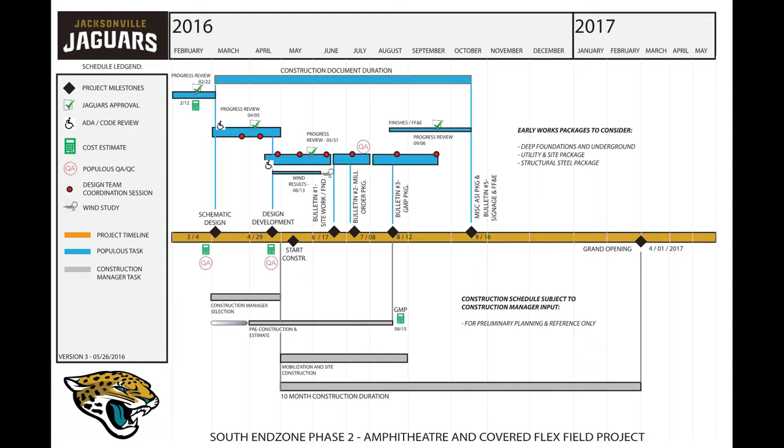Knowing we had this constricted period of time, this highly complex project, we needed to find a way to define our process, define the people doing it, and define the programs we'd use to execute on this. Now, we all talk about collaboration—everyone collaborates, we get it, right? But how do you take a project and a distributed workplace and make it work?

Walter P. Moore used offices in Los Angeles, Kansas City, and Tampa. Populous had people in New York City and Kansas City. We had engineers all over the place.

We had our construction manager in Indianapolis and Jacksonville, and ARUP, which is out of New York. So we had to figure out how we could define a workflow and a work plan and create it in a more integrated way.

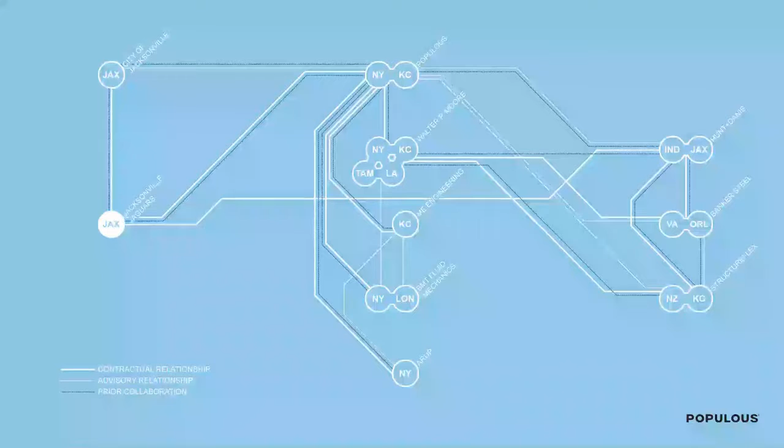Steve likes to refer to this as the London Underground map because it's all over the place, but this is a cool diagram because it shows the 18 different entities with the 3 different relationships. This project was a design, bid, build project, but the minute we signed a contract, all that went out the window.

It was definitely design assist, it was IPD, it was all those things. So what this shows is Populous is at the top of the page in New York and Kansas City, and then under that we had Walter P. Moore, and again we mentioned all of their offices, Los Angeles, New York, Kansas City, and Tampa. And then the map just kind of shows how much of these collaborations and communication strands are advisory versus contractual versus prior collaboration.

In other words, when we were asked to take over ownership of the materials model, the fabrication model, obviously the first thing we had to do is change everything, open up a dialogue with Banker Steel, who was the fabricator, and Walter P. Moore and Populous had to have that conversation. We weren't obligated to do it, but we knew we had to do it. So this essentially blurs the line.

The other thing, as Steve and I were having drinks last night, we were talking about -- we don't endorse this process. We were put in a position where we had this fun, very unique project that was important to us, and we had a period of time to develop it and execute it. If it ever happens again, I think all our bosses will be like, don't agree to that, because it was just so intense.

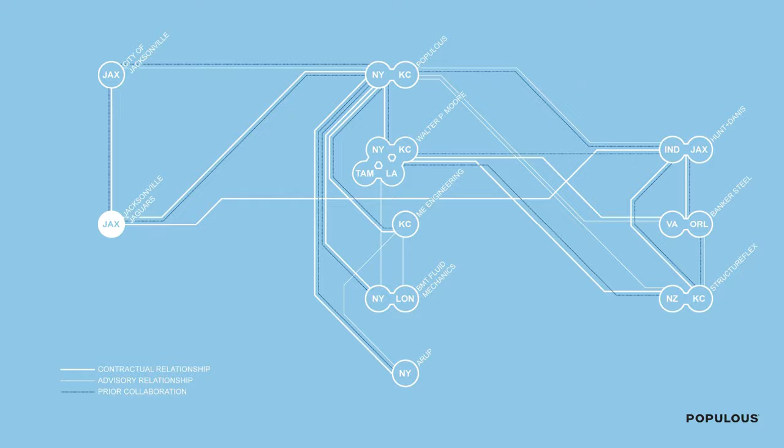So once we defined the period of time, we had our schedule. We know when our drawings were going, what bid packages we were going to target. But what we did was, Walter P. Moore actually authored this schedule on the left.

You don't need to read all the red and blue stuff up top, it's very linear in nature. We were doing things before other things were done, taking tremendous risks, just making sure we're talking to people and saying, if we do that, this has to happen next, and making sure people knew they were accountable. We really kind of set a table and said, look, these 6 things have to happen, and if one of your things isn't happening, you need to let everyone know as fast as you can.

What this defines is it took our schedule and our design time -- and I'm not talking just schematic design development, I'm talking fabrication. I'm talking Walter P. Moore developing the Tekla model within 11 weeks.

Halfway through that 19 weeks, these guys are building a steel model, taking the Rhino model, putting it in Tekla, doing the Tekla model, providing shops, having dialogue, flying out to Lynchburg, Virginia, meeting with Banker Steel, and really trying to figure out the best way for us to take our models and convert them to Banker Steel for fabrication.

Fabrication took 19 weeks, and then erection took 18 weeks. I'm talking erection of 160,000 square feet of area, which encompasses a 94,000 square foot covered indoor football field and a 6,000 seat amphitheater connected to the stadium.

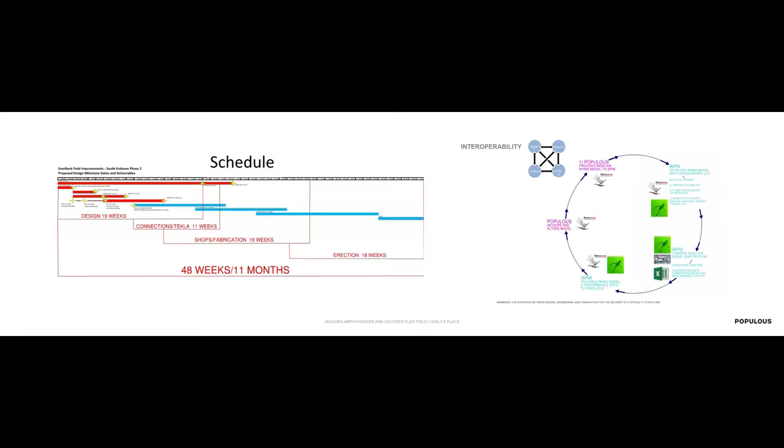So the workflow -- I didn't say everyone's done all this stuff, but we did it, and we did it all in a condensed period of time, and we reinvented the way that we were working.

So this diagram shows the different parts of the 5 little wheels of action. Populous and the design team, including Walter P. Moore, because that was part of the prior collaboration at the onset. We came in, started designing, and defined what was a priority.

We knew it wasn't about the floor plan right away. We knew what the floor plan basically was going to be, we knew what the program was going to be. But we had to start down from the top -- we had to start with the iconic nature of the roof and how the roof was going to be, well, iconic.

I know it's totally subjective, but in this term, Shad Khan had his version of iconic, and we knew we had to do something different than he's ever seen before. So we took 3,000 tons of steel, hung the roof from it, and then built a fabric box around it.

Then we encased all that with concrete. So now we knew we're hanging a roof from the structure, so from inside the space you're looking at the waterproof environment with all of the steel penetrating. Obviously that's a task in itself.

So we started the model out in Rhino and Grasshopper to define the process and what the shape and form was. That Grasshopper model was currently shared with Walter P. Moore on a regular basis. That process went through optimization, and Walter P. Moore could help us rationalize cost. Obviously, I mentioned cost was a big deal.

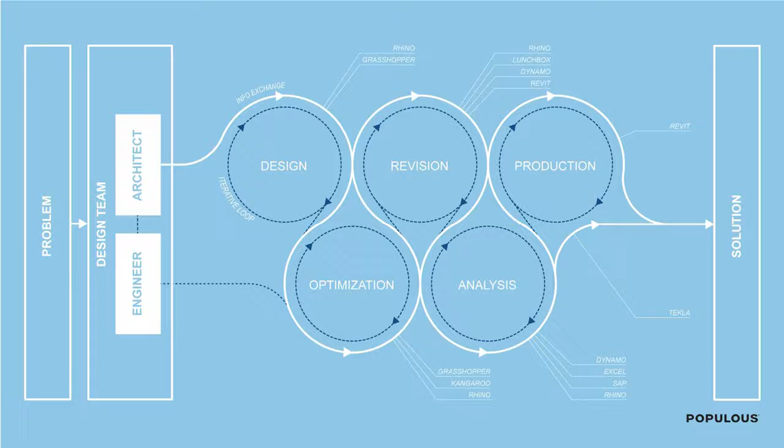This is just a good diagram, very illustrative of the parts and pieces. Starting here from the left, I mentioned we had the roof hung, a PTFE roof, a Sheerfill product if you're familiar. We used Grasshopper to really organize the process, and to me it was important that it was organized so that we had multiple people in multiple different places using the same Grasshopper script and platform. We always talk about BIM plans, right? This should also be a part of that.

So the design, let me spend real quick and tell you about this design. The iconic design is performance-driven aesthetics. This thing is for the Jacksonville Jaguars and the city of Jacksonville, a 50-50 venture. Obviously Jacksonville is a coastal town of northern Florida.

It's bordering St. John's River, with a lot of estuaries. It was an old shipyards town, so it's very industrial. It's got three really beautiful bridges, all different colors, all illuminated. It's part of their vernacular.

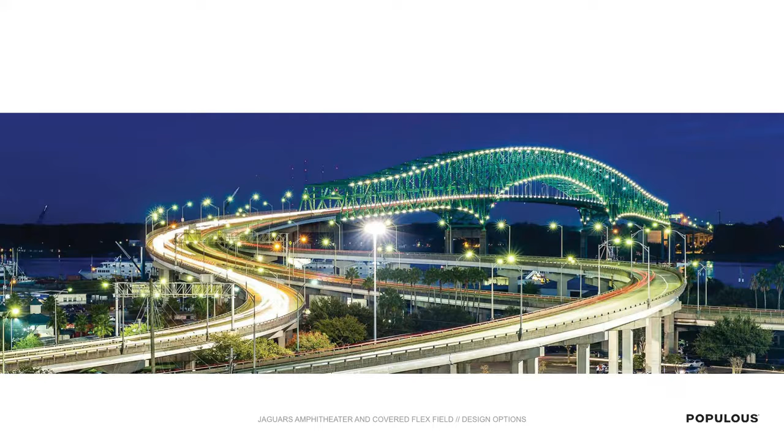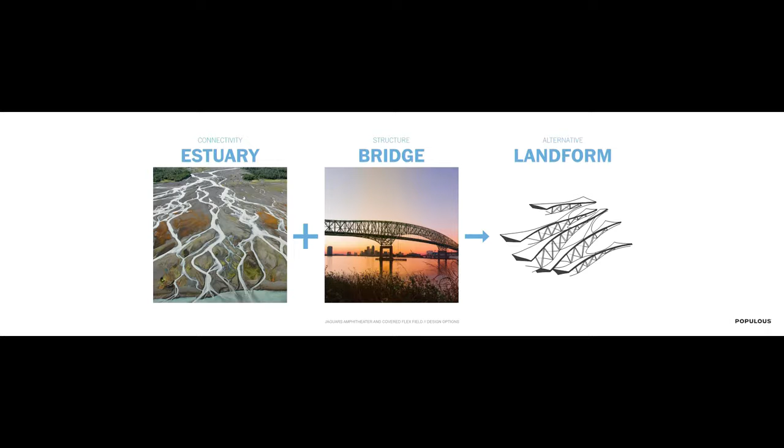So you have this culmination of estuaries, these bridges, and the landforms because of the sea dunes, and it's a beautiful place. So Shad likes that, right? So we use that as our driver. And then we also knew from a programmatic standpoint, it had to influence sport. It had to invoke their brand. It had to be a part of who they were as a growing team. Finally, they're good, so that helps. We like to blame it on the covered flex field too. And it had to entertain.

So now Shad Khan's trying to blend two programs. Nowhere in the National Football League is there an amphitheater and an indoor training center that systematically unite, which is one of a kind. Therefore, there wasn't much precedent we could take from it. We did tours of amphitheaters, went all over this country looking at the eastern side of the country, and really tried to find a way to bring in entertainment.

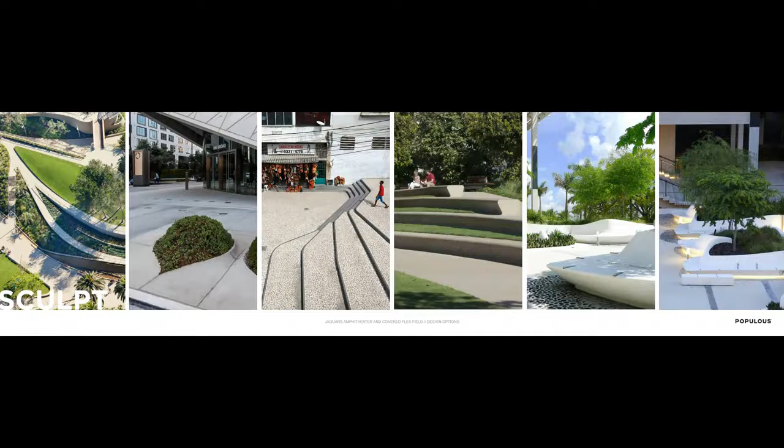It obviously had to interact. He wanted people to move through the building. He wanted it to be iconic. He wanted it to be a place, even if there's no show, he wanted people to come and hang out. Again, we talked about sculpture. So these are all the drivers that we showed to kind of get them going.

We talked about performance from a building, how it was supposed to operate, but how does the building, all these parts and pieces we just talked about, we had to figure out. So the existing football stadium is connected by the amphitheater. The amphitheater is a 3-level amphitheater.

This section, when we did a sightline study and we were trying to define how close everything goes, we studied a lot of different little boutique theaters, right? Because 6,000 seats is not that big. We're not talking a big - we're talking Broadway, Radio City Music Hall type of facility. So what we did is we took the Radio City Music Hall section, kind of parti if you will, and we really kind of organized around that. So the sightlines in this place are incredible.

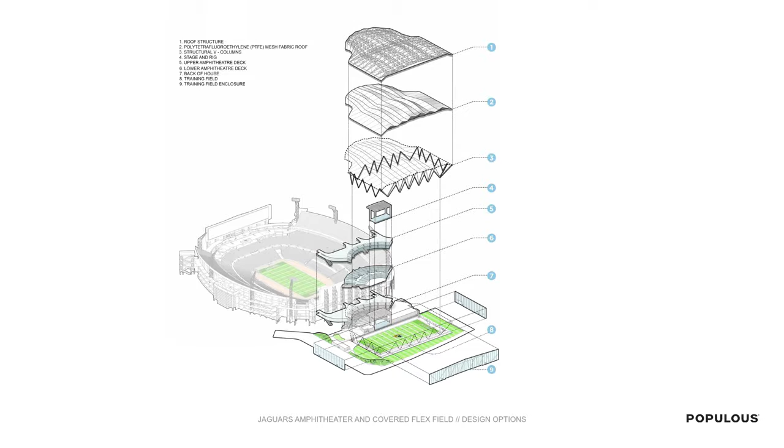And then that had to abut up to an indoor practice facility. And then of course there's public and private security reasons that we'll get into. So that shows the kind of section. And then here shows the existing stadium, the amphitheater, and the covered Flexfield with the roof.

One thing to note is the Everbank Field has the largest scoreboards. Actually, did Atlanta just take that claim? So let's just pretend that they're definitely one or two, but their scoreboards are like 120 feet long on both sides, and they got these very enormous - the scoreboard is this guy right here. And then they have these really accentuated steel trusses to mimic the bridges.

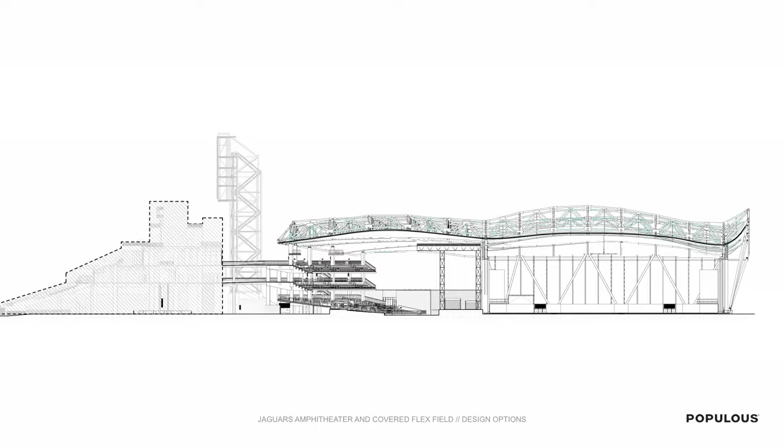So our building, when I said we flipped it, right, we put the roof on the underside of the structure. We really wanted to complement that and do it in a good way. So again, we have the estuary, how the building flows, how the program flows. We had the exposed bridge with the roof membrane, and then the performative deformation.

So from a drainage strategy, passive, like for cooling - the building's not air conditioned, right? So we had to create a breezeway effect, so the winds and how the water drains off the building. Obviously, you can't just put scuppers and downspouts around this whole thing because it's a fabric roof with fabric walls. So we had to be very careful on how we shed the water off the ground or onto the ground. So this shows some parts and pieces that we really started to analyze.

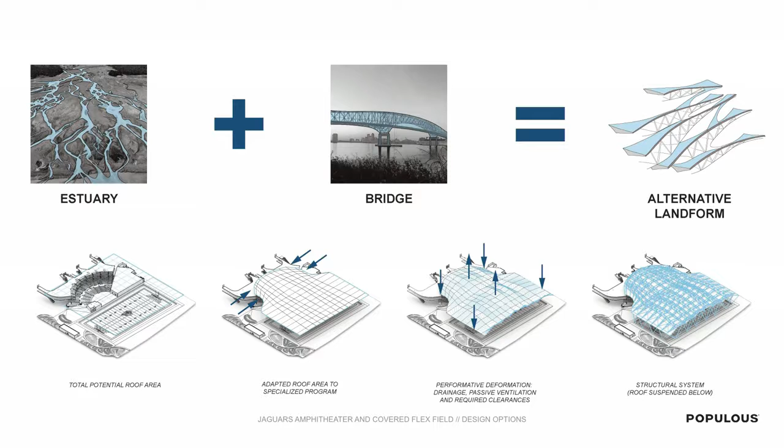So then Walter P. Moore came in and we started building the model and we started doing analysis and we started to really push the limits on our software. We knew what was important to us.

And this is just an image of an elevation of the front facade of Daily's Place showing the scoreboards in the background. One thing also important is that the south side and the north side, you see - well, I guess, sometimes I forget I'm short.

So the big opening in this area, these are large aircraft hangar doors, so they open so that on both sides basically, so when they're in the covered Flexfield, it can be an outdoor environment, right? Because they don't want the football team practicing in air conditioning because they don't play in air conditioning. But they have the doors for security reasons.

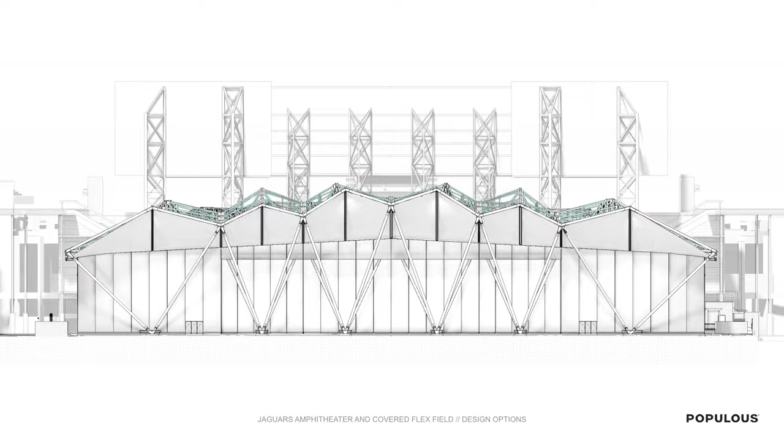You see the inside of the roof. We put the roof again on the underside, which Steve still thinks we're crazy. And then you see these light ribs, which is secondary trussing that we use just to hang stuff off of, essentially.

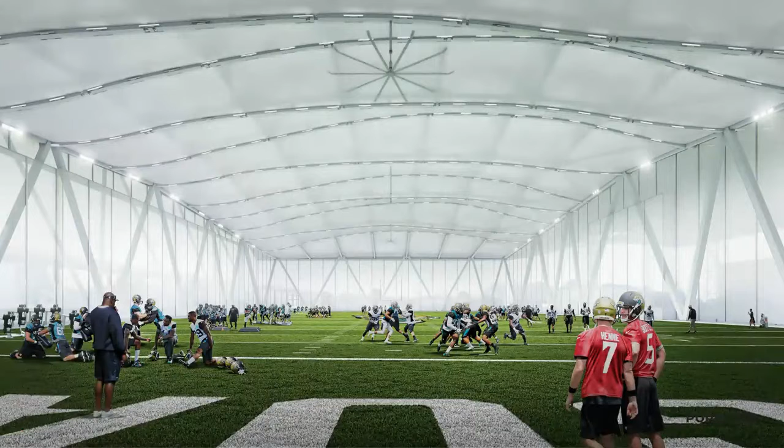And then the proscenium for the stage, and then the inside of the covered flex field. So this is a scenario where, from a design standpoint, we really wanted to be complementary of the industrial nature of Jacksonville, but on the inside it was about sport.

You go to a museum and the museums are simple. The museum's about the artwork, it's not about the architecture on the inside. This is the same thing conceptually, so we really wanted it to be clean. We wanted it to be a big fabric box that glows.

So you see there's some program, we have goalposts and we have big ass fans - those are really what they're called. And then the rest of the stuff is just fabric. I have some pictures of this in a minute, at the end of the presentation. But this is what we sold him, and this is what he really liked.

So now we have to figure out how we make a building like that watertight, how we make the building drain properly, how we do it in 12 months, which is still crazy.

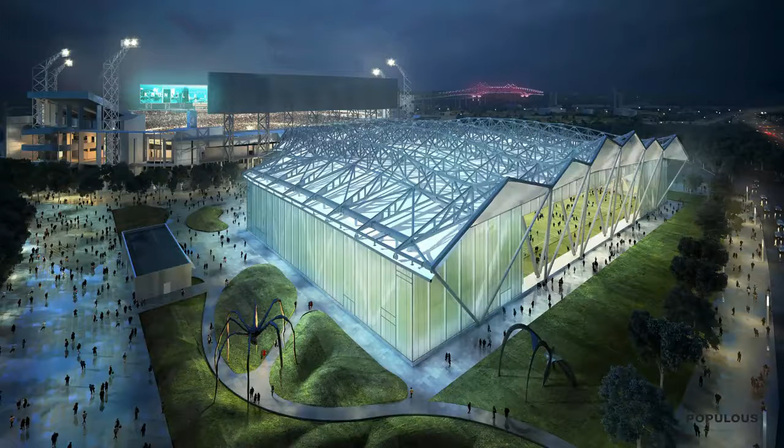Here's a rendering of the building from an ISO. So you see one of the bridges - the other bridge I showed you was a green one. There's a red one, there's a blue one. The stadium's very industrial, it's a lot of steel trusses.

So part of our 12-month period, we then had to go and get code approval for a brand new product out of Germany, which was interesting.

We had some optimization strategies. We knew that we had to reduce the building width, the surface area of the roof as much as possible. We had to find ways to constrict the bowl so that all the cast-in-place concrete was as efficient and economized as possible. We find out ways to phase.

Normally we don't get into means and methods, but in this project that was a big part of our thing. We had to figure out what needed to be drawn, what needed to be modeled, and how we're going to build it - so even the shoring and erection that Steve will talk about was a big part of our design, big part of his design, based on how they pick everything.

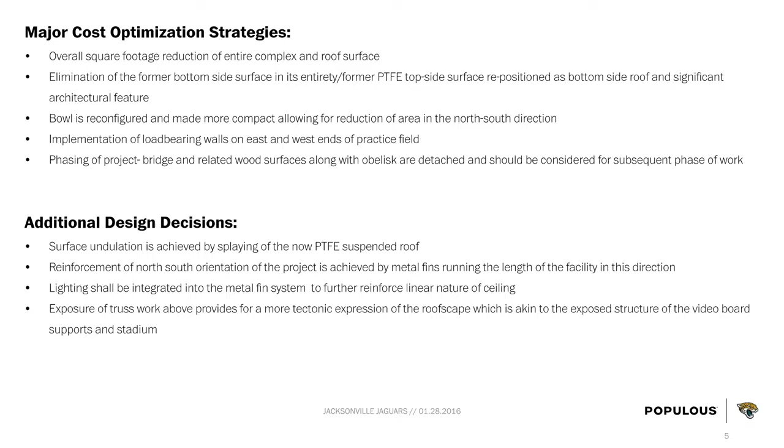So surface undulation, how it's all reinforced, and all exposure - we set up a bunch of stuff that gave us priorities, so that when we did analysis, we knew what we were looking at.

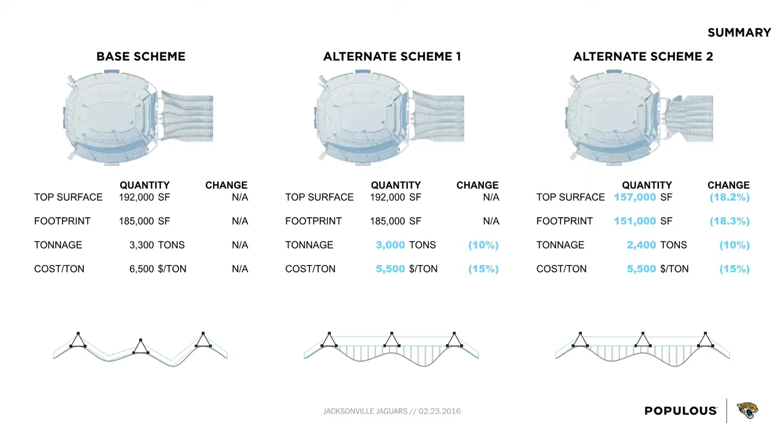This just shows from the base scheme, we originally started at 192,000 square feet of top surface, and we ended up down to about 157,000. Just through this analysis, we were able to do it without losing any time. I would be so bold to say that we would not have been able to do this without the software and the analysis that we used in that period of time.

So then we really got into our leverage and our capabilities, right? So how do we take - we have a Revit model, we have a Rhino model, we have all the Grasshopper script and the support in it.

And then, from that point, the collaboration between Hunt, Danis Construction, Walter P. Moore, Populous, and Banker Steel, we really had to dig into the parts and pieces. So Steve's going to talk to you a little bit about some of those parts and pieces that were interesting.

Can you guys hear me?

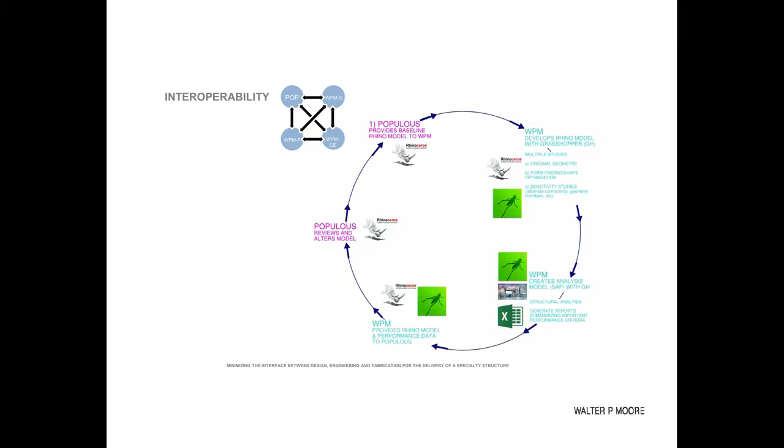Just to follow on from Tom, I think there were three unique things about our workflow that describe the parametric design. One thing we had to do very early was use interoperability. The way we approached it was to use Excel as a container and come up with a neutral file format that we could share between ourselves, Populous, and the other design partners.

The other unique thing about this project was we all talk about digital workflow, we all talk about Grasshopper, but how do you share that digital workflow? So we had this concept we could describe as a recipe, and by sharing recipes, somebody can take somebody else's digital workflow and repeat it. You can see here this describes the inputs, the outputs, and all the files associated with that workflow, and all of that information is stored in a recipe.

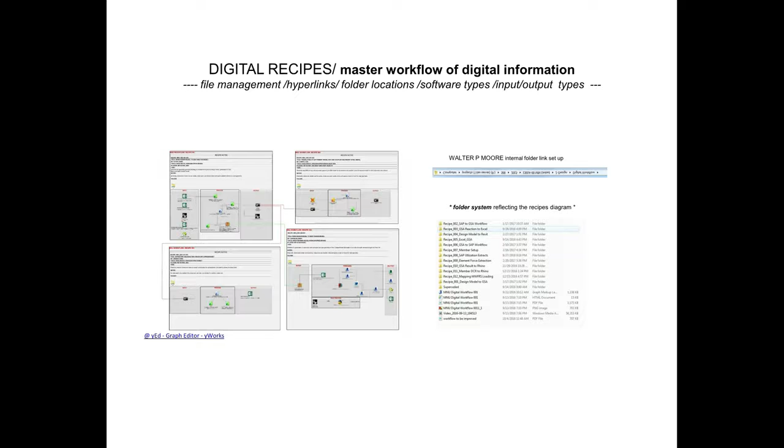The other unique thing, we embraced interoperability through a neutral file format. The idea was coming up with a CSV-based file format that could be shared between our different programs. As the engineer, I'm mainly concerned about the primary structure, analyzed in a program called SAP, very similar to Robot. For fabrication, Tekla is the standard tool with a high level of accuracy, so we can share that information with the steel detailers. For documentation we use Revit, and for the design driver we used Rhino.

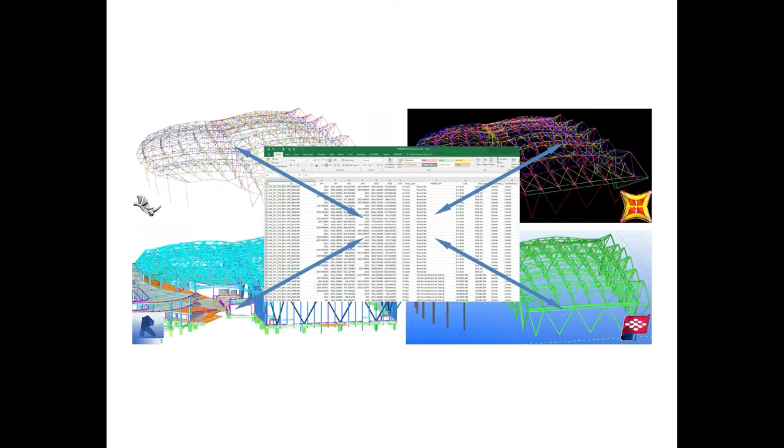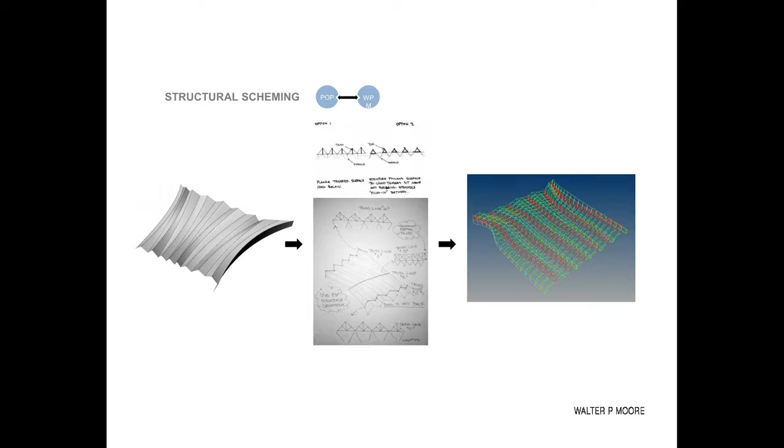So how did our process work? The first thing, similar to what Tom mentioned, was we started off with a design surface given to us by the architect. From that driver, we then instantiate what we think is a suitable framing scheme. This is a sketch of my boss's idea of how to frame it, and then we start exploring these different framing options.

Another key thing - we did something crazy on this project in that we put fabric on the bottom, and because of that you have to be very careful about the drainage. So we went through various iterations with Populous to massage that geometry, and one of the things the digital workflow told us was, okay, can we adjust the geometry to ensure we get drainage? That was a good parametric exercise which really informed the design.

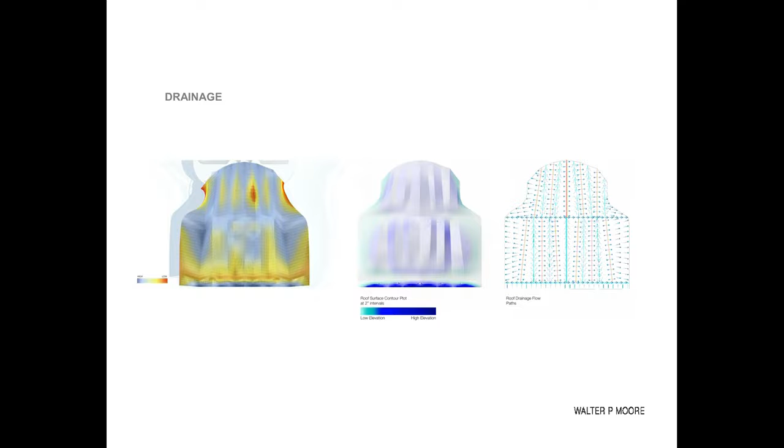For each of these structural pieces, we had an associated tool. For fabric secondary, we used a tool called GSA. SAP was generally used for the primary structure, and then we used Revit as the medium to pull all of these pieces together and coordinate between ourselves and Populous.

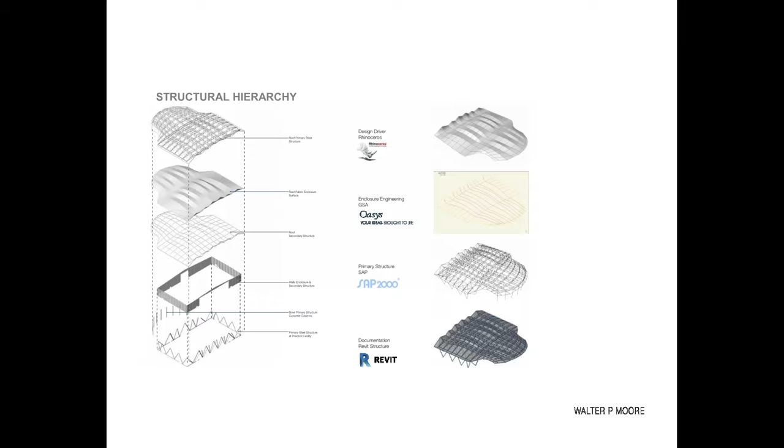Just to really explain how parametrics worked on the project, this is a typical exercise we would do: taking the inputs, which is a design driver surface from Populous, and our database information of what secondary steel size we need. We then set up a recipe to push that information into Grasshopper and write our own scripts, user objects, and custom components to pass that straight into the analysis model. The task is to take Populous' design surface, rationalize it to a series of meshes, instantiate the secondary steel, and introduce the fabric seaming, which is important when you analyze fabric - you have to make sure the seams are in the right direction.

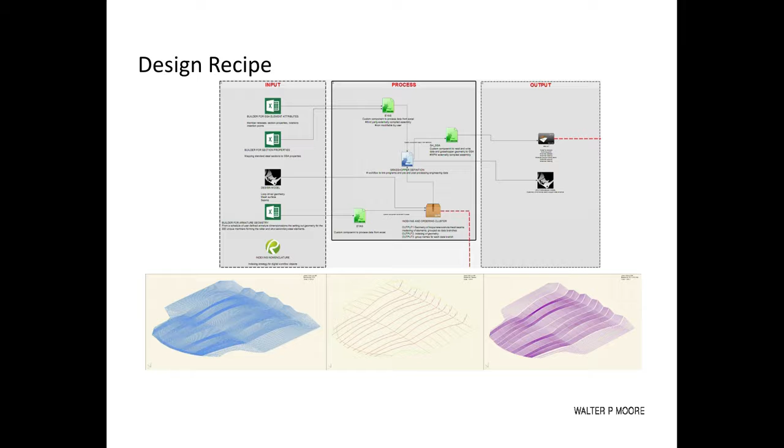Another thing we utilized the parametric workflow for was trying to get a high fidelity of wind load. There are two ways to do this: you can go by code, open a book, rationalize this crazy geometry and work out your wind loads, which generally is conservative. Or you get a wind tunnel consultant involved and try to map these wind pressures to your analysis model. We had a workflow where we could take an Excel data sheet from the wind consultants, map it to the design surface, and through our workflow push it through to our analysis model.

The key thing here, like Tom said, is we already bought into a weight of steel. So by having more fidelity in our analysis, we can make sure we're keeping that steel tonnage constant through the design. This is a high level of fidelity, but in this case it was worth it.

I'd like to add, the secondary benefit of this was our owner was trying to insure a building that's never been done before. Their insurance company was asking all kinds of questions. Your roof is 160,000 square feet of fabric. What happens when a panel collapses? How can you assure me of that? Hurricane Irma came through, and I'm proud to say we had not one tear or loosened fabric.

So this also allowed us to be very conscientious about the realities of building construction in a coastal climate. We got a lot of value out of this. The wind engineer was BMT out of London, so predominantly our New York office was coordinating with them to do that.

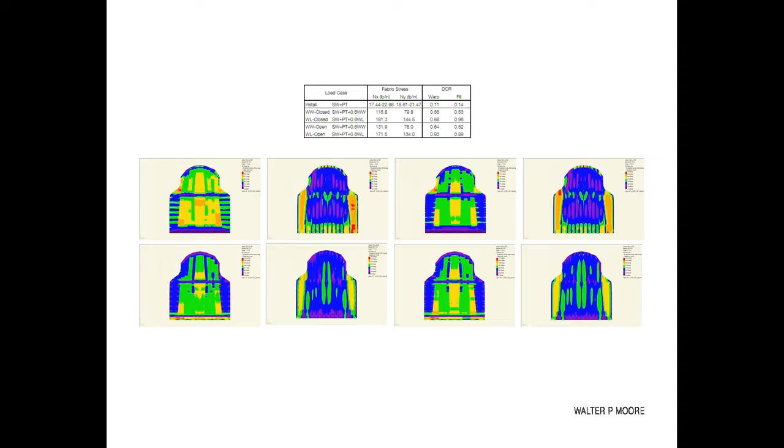As an engineer, what we try to do is present these results graphically so we can have a conversation with a client and tell them, okay, we have some issues here in that the capacity of the fabric may actually not be as great as the demand. So what I mean is we always compare demand versus capacity, and provided your capacity is more than demand, you're okay. This is a graphical illustration to make sure the fabric is working for the applied wind loads.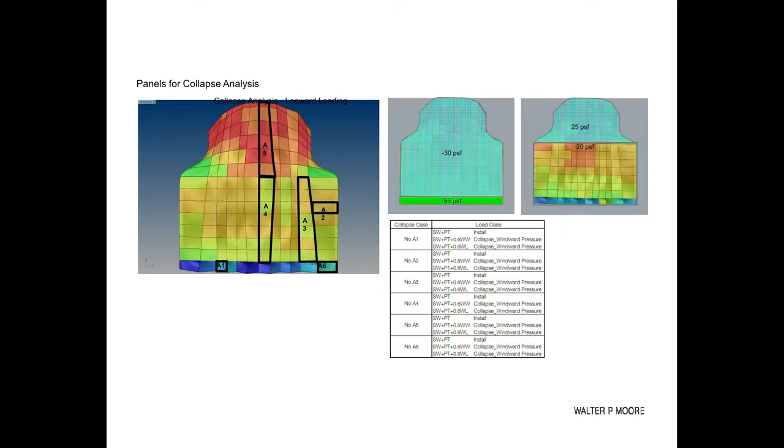We also have to sometimes consider extreme load events. So that is what would happen, which we're pretty confident it'll never happen, but what would happen if a fabric panel failed. The way we approach that is to identify some key zones and really remove the fabric from the analysis and just see what it did to the fabric stresses.

This isn't an actual service load case. This is us saying, okay, if a panel failed, are we comfortable that the steel supporting the other areas and the fabric don't get compromised? Because if you take a panel out, the forces have to go somewhere else.

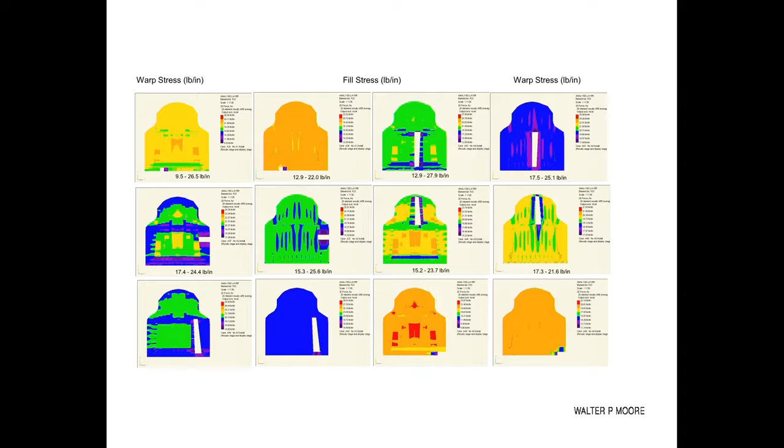As Tom said, we're moving at 1,000 miles per hour on this project, and we have to look at ways to save tonnage. We have to look at ways to minimize risk. This is an example where in our original design we had these transverse secondary steel members, and the potential issue with that is there's more opportunity for problems with waterproofing.

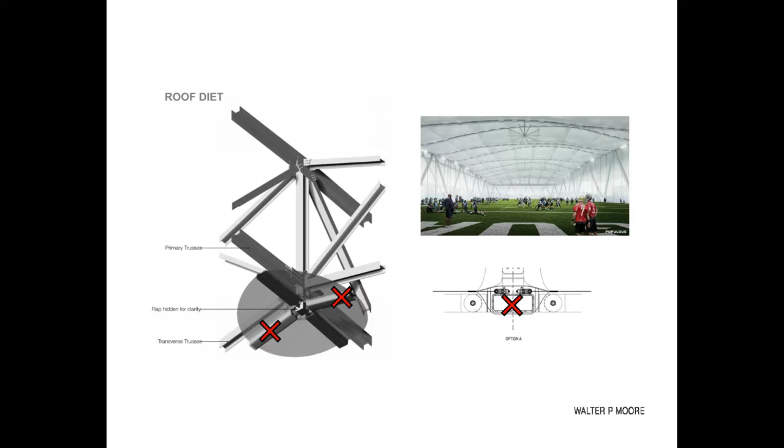One study we were able to do very quickly and parametrically is we had the analysis model set up, and then we could just explore options of taking the steel out. Is it compromising the fabric strength? There's other variables too.

Like Banker Steel, in February we said, hey, we have this building, there's 3,000 tons of steel coming your way, and we need it in 6 months. Most of the time, those people already have a backlog. They're not available, they're not interested, and they just don't have the material.

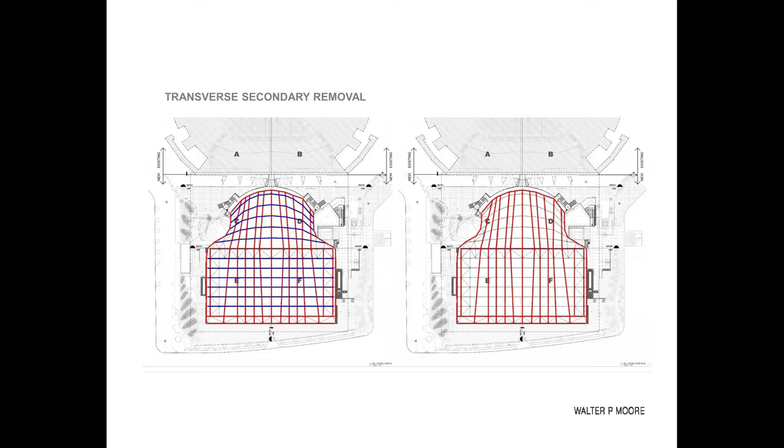So there was a period of time, because we're all undulating in steel, where we realized we can't get all that curved steel, or we can't roll all that steel. Can we find ways to incorporate segmented steel without compromising the design? That was another part of this analysis that happened concurrently with us developing and modeling our project.

Another key problem here is we're moving very fast, and we're having to almost run 2 parallel models together. The way we approach that is to consider the modeling of the secondary steel and the fabric in a tool called GSA. The primary steel was done in SAP, and these 2 analyses were happening in parallel with one another. At some point, we have to pull them together and make sure that the forces imposed from the secondary steel on the primary are acceptable.

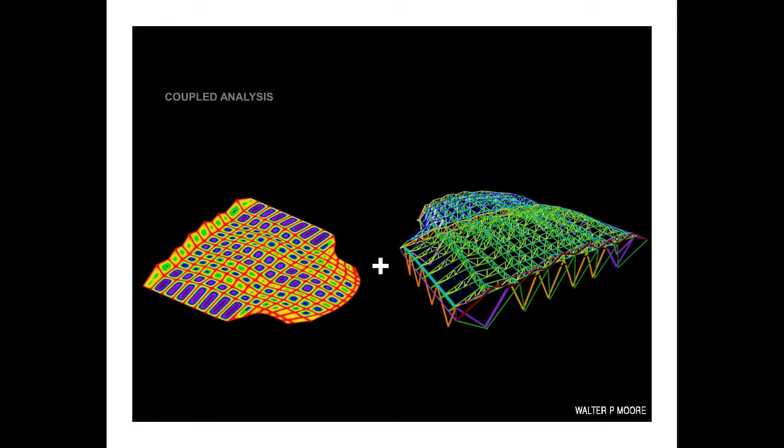It's not overstressed. In terms of the primary structure, we have what we're calling the longitudinal trusses, with a typical span of about 300 feet. The load from the longitudinal trusses is then resolved into what we're calling these mega trusses. In terms of fabric stress, that is carried and resolved into the transverse trusses, which then get carried back to the longitudinal and back to the mega trusses.

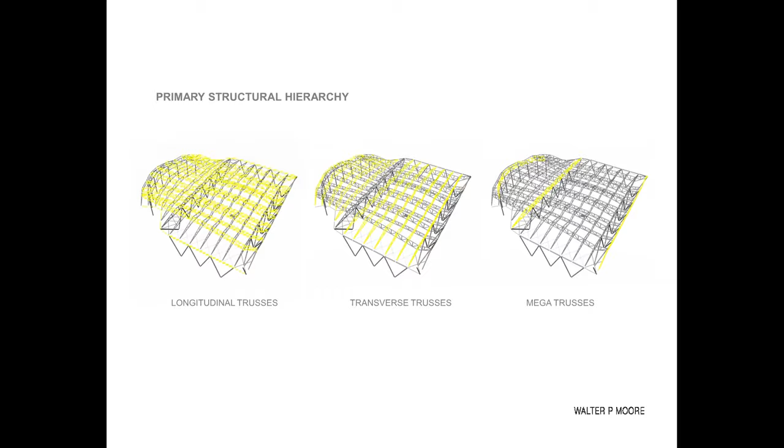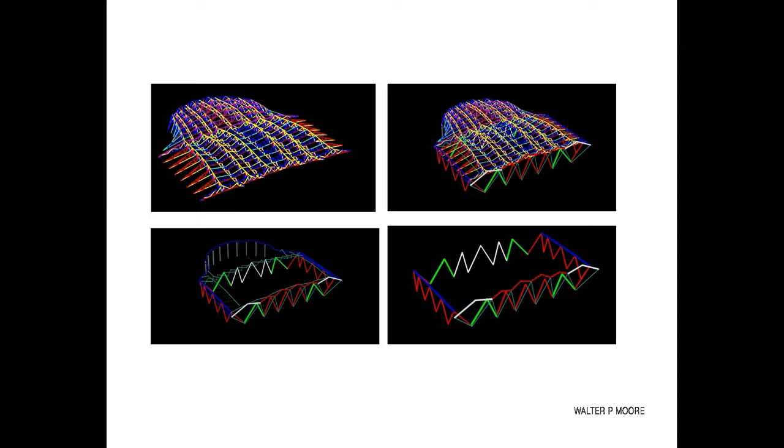What we're doing here is we've already agreed on a steel tonnage, which we've bought off on, and we're trying to maintain that tonnage as we explore all these different design options. This kind of gives you an idea of some of the optimization required. Every single color represents a different steel section, so there's very little regularity in the steel shapes and weights. The only perpendicular steel was the column and the foundation plate; everything else was some obtuse angle.

In terms of the parallel analysis, one thing we found useful with the parametric design workflows is not using it just as a means of building geometry, but as a means of QC in our model. So simple thing we're doing here, we're just making sure that the applied load applied to our GSA model, which is a secondary fabric model, ties up with that load.

You then put on a parallel model, which is in SAP. So quick QC check within your workflow: maybe you have a point cloud that's a vector associated with a point cloud, which is your force. You can very quickly sum them up, and that gives you your total load.

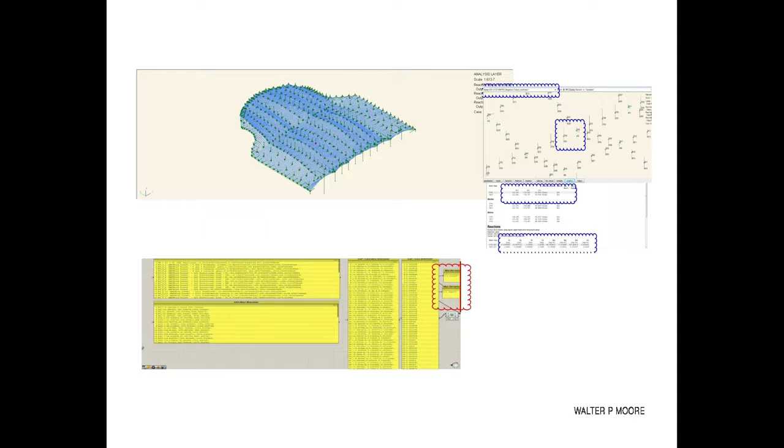And then what we had to do in a secondary steel model is, we have a whole point cloud of vectors representing a point of application of force, so we have to map that to our analysis model. So the workflow was very good there.

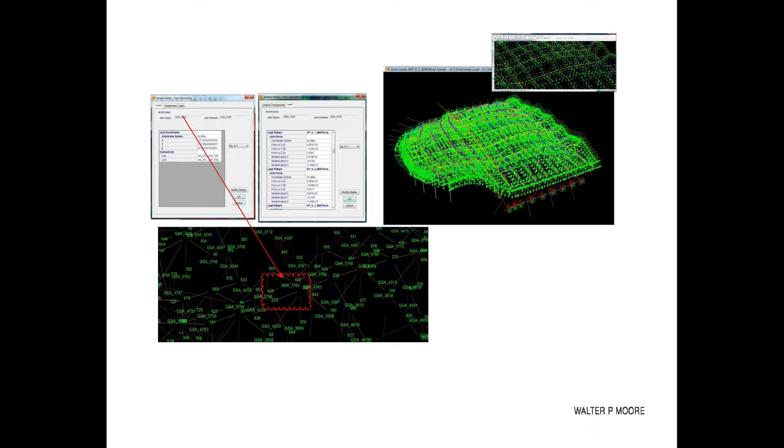We weren't actually building a model, but we were using it to transfer information and make sure the fidelity was pretty high. So what that means is we're just making sure we're tracking the ID of the vector in one analysis software to another—almost like Revit, you have unique IDs. That allows the engineer in the primary structural model to make sure you've got a one-to-one relationship, and I'm happy that our forces have been translated correctly.

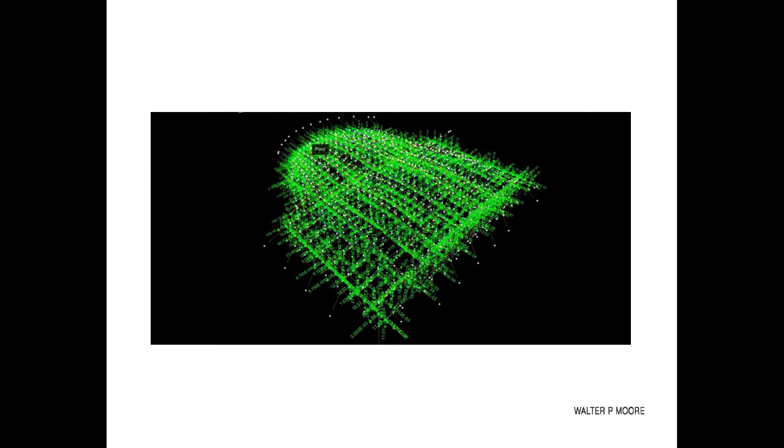This gives you an idea—this is just for one load case. For each load case, there's probably 4,000 point reactions, each one different. We're going to this fidelity because we've already bought off on a steel tonnage, so we want to make sure we're taking as much opportunity of parametrics and digital workflow as possible to make sure the fidelity of the data is 100% accurate.

The other thing to think about is it's not always just about optimizing—you've got to think about structural performance. So the other key driver we always had to meet was to make sure the structure was within what we call a frequency, which is an idea of how much a structure vibrates. A low frequency means it's really soft; high frequency means it's stiff. As we're going through these design explorations with Populous, we're always producing a summary sheet that tells us, yes, we've optimized the steel, but is the structure still stiff enough?

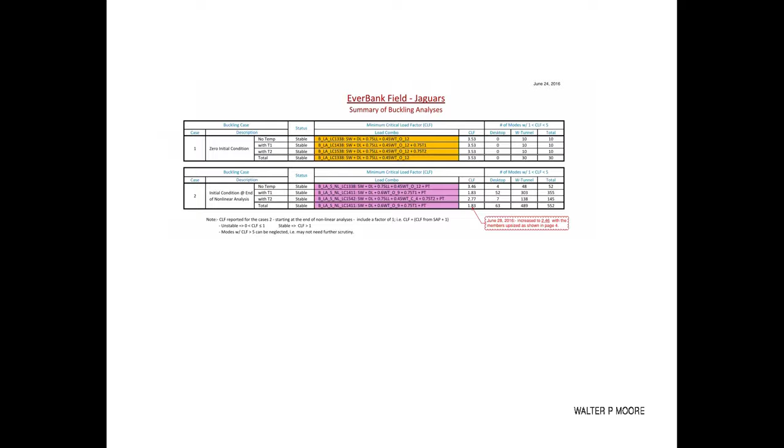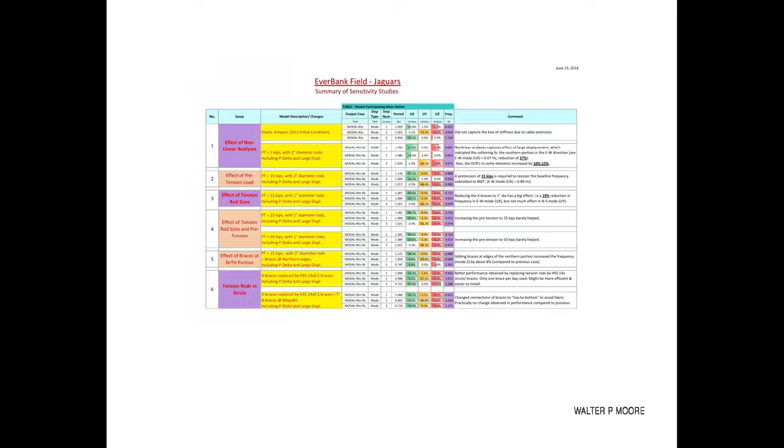And then again, setting up a design matrix where we may explore different design options with Populous—for instance, can we remove cables for bracing and introduce rods? The simple issue there is if you use a rod, you can't get the same amount of tension, and the frequency of your model may actually go down. So working parametrically with an architect and engineer, you sometimes have to set up more performance-based criteria that aren't immediately obvious when you start the design.

And this shows again this idea of always tracking the model, always tracking the weight, always tracking the frequency. When we started the project, I think we agreed to a tonnage of about 3,729 kips, and just for these 5 different iterations, you can see we managed to reduce that but still keep the stiffness up.

And this is another application where Hunt Dansby Construction, our CM, was leveraging us and our tracking, our parametrics also, because there were 2 prices they were getting from a steel fabricator.

There's one price for the more complicated stuff, and then there's a different price for the easy stuff that they can get off a line. So when we were going through this, we worked in tandem with our CM to make sure that the numbers that they thought they were tracking, that Banker Steel was saying that they're ordering,

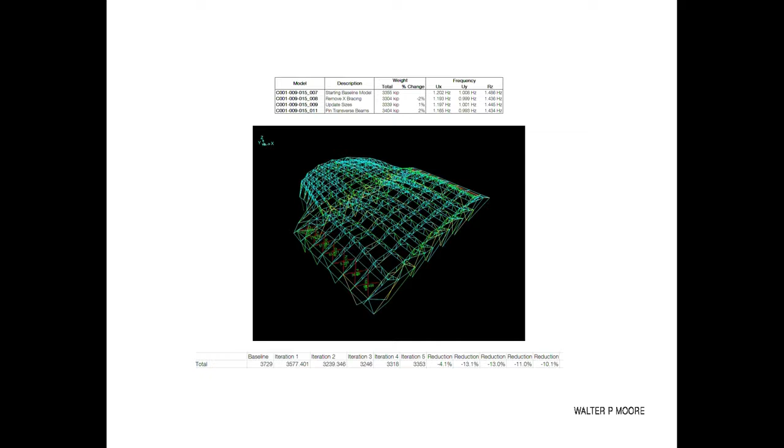could always keep those two things simpatico. Then the other piece we got involved in is not just the engineering, but we have to make sure that all these pieces can come together. We have to make sure we can fabricate it. And the complexity of the structure means there's a high level of detailing required - that is, how does a fabric get connected to secondary? Do we have the waterproofing?

So this is an area where we blurred the line. Remember, I told you it was a design, bid, build process, but we just completely threw that out the window as soon as we got going. Walter P. Moore and Populous actually took on the onus of the shop drawings for the fabric. So instead of us doing a structural steel layout, giving it to the contractor who gives it to the fabricator, and they do shop drawings and give them back to us to look at - we did the shop drawings for them.

So they basically moved money from the construction budget. We wrote an ASR, an architectural service request, to do that service on the front end, so that Walter P. Moore and Populous were doing that from the onset. And then furthermore, when we did the fabric, we hired a company called Structurflex that did all the fabric roofing, and instead of them hiring somebody else to do the detailing and shops for them, they hired Walter P. Moore to do that, so they were one entity doing everything. So there was no shop drawing process - their drawings from the onset were the fabrication drawings.

And so the way we approached that is that we have the idea of this kind of common file format that we're distributing between different tools and between different partners. Very early on, we set up a way of IDing a lot of these elements and making sure we're able to track that ID as we go through different programs.

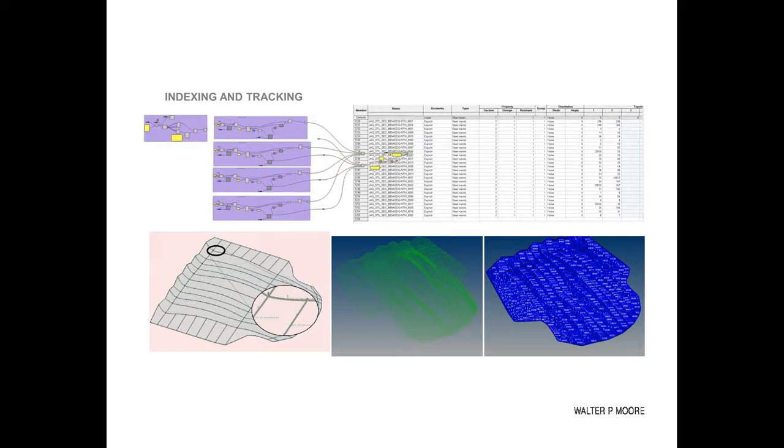And really, that also helps with documentation. As Tom said, there's no real grid lines on this project - everything is organic, I don't think there's any symmetry in it, there's just nothing. The only way we can really approach that is to document it in terms of identifying unique IDs or node points, and through an indexing strategy be able to coordinate those geometrical data points between the fabricator, ourselves, and also the fabric contractor.

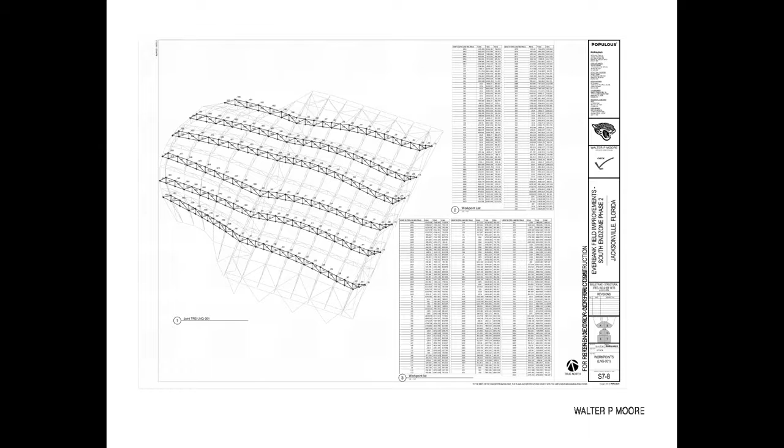And really this gives you a sense of the fidelity of some of the fabrication and digital modeling we had to get into. So the image to the left is our Tekla model. This is an image of the cast being fabricated in the shop, and then this is how it all came together in the field. You can see you got a pretty good resolution between this and the digital - this is all done by Walter P. Moore, running in parallel.

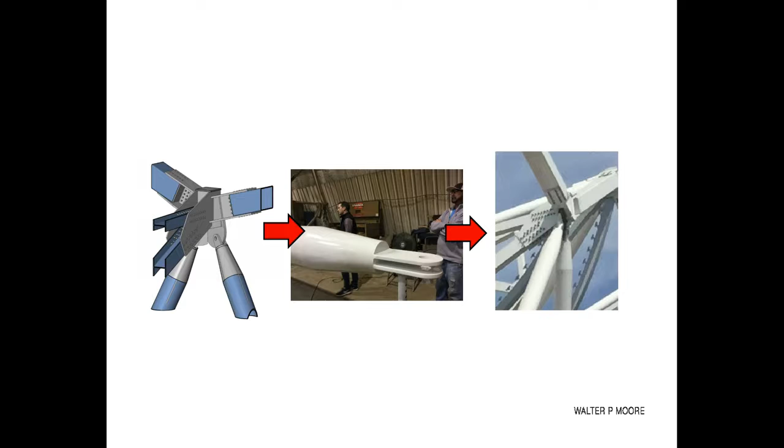And again, this idea of indexing - the importance here is for this connection, it has to be engineered. So that means we have to be able to transfer our connection forces from our analysis model. And obviously, if you know what the IDs or the index are of those models, you can easily extract the forces - you've got coordination with the detailing.

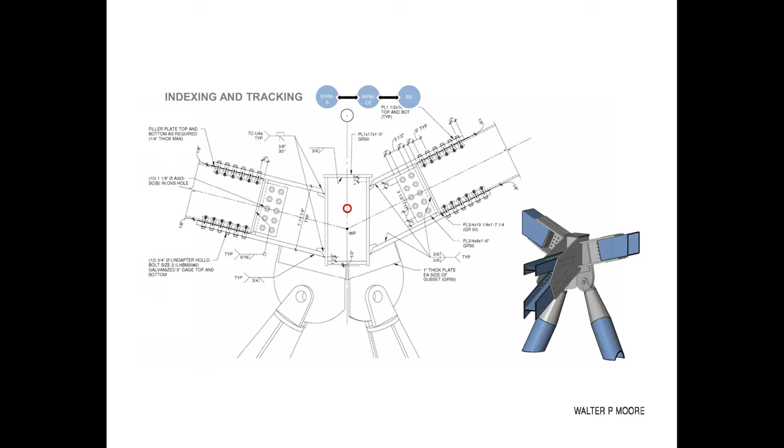And again, we have our basic database of IDs and section shapes. We kind of decide between ourselves what information we're going to carry between the different platforms. Then we're able to quickly push that information, say from a SAP model into a Tekla model, utilizing the API and writing your own custom component. That information was pushed directly to a Tekla model, so every element was ID'd.

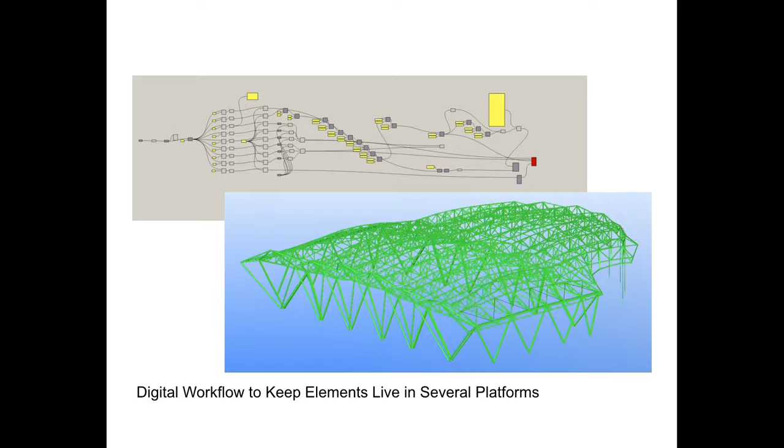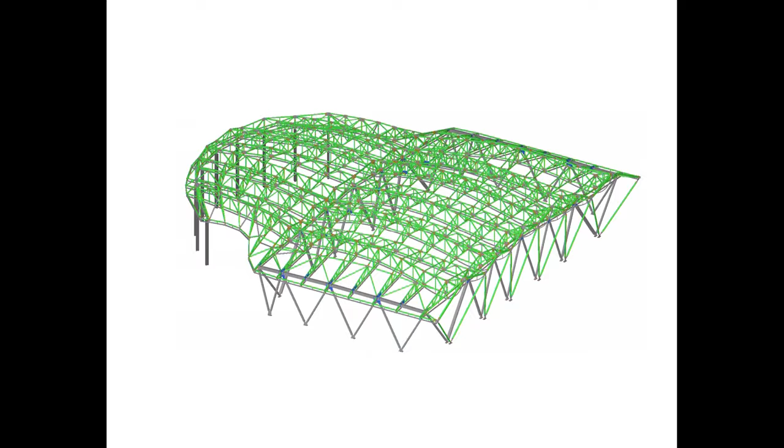And really, that's the bare bones model. A Tekla model isn't just about the steel, you have to build all the detailing on top of that. This shows the complexity of it. You can see we're starting to instantiate some connection details. Each connection detail needs to be coordinated, engineered, and represented in 3D. The problem is, you've got fabric on this model, so there's a lot of coordination and busyness going on.

Another few screenshots. As Tom said, we actually had to take some ownership of what we're calling the tertiary detailing. Every tab that the fabric was attached to was also brought and put into the Tekla model. We used Rhino and a Grasshopper script there to instantiate the tabs, and then that was exported as IFC or IGES into Tekla.

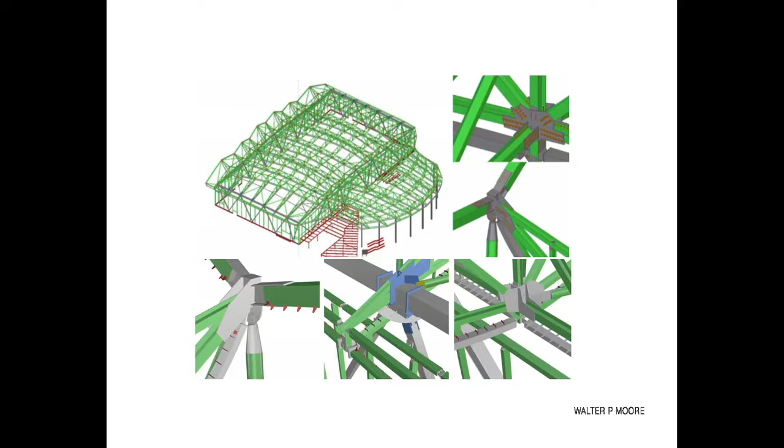Then you can really start to see the complexity and the coordination needed. We have a very basic primary structure. We try to save costs by regularizing the primary structure so that it's just segmented. Then we put the expense into rolling the secondary steel. The secondary steel is where we make sure we have enough curvature and want to make sure there's drainage. And then all of this has to be coordinated.

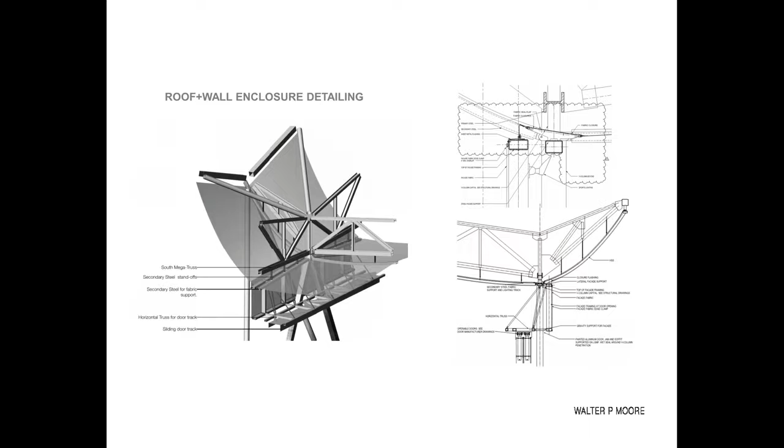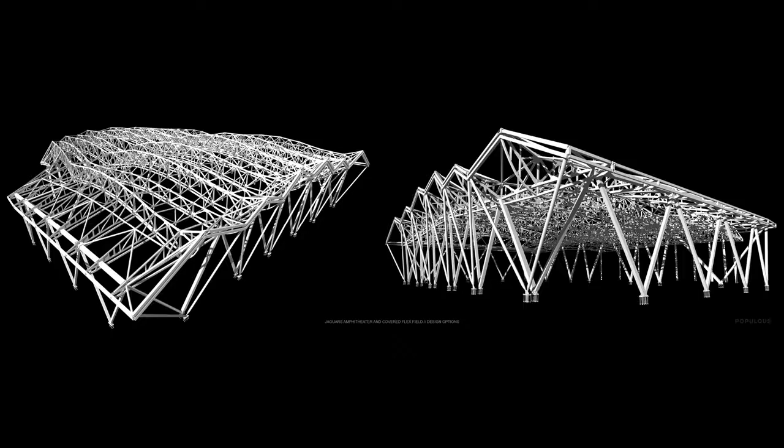I think you'll have some shots to show that, right? Yeah. It's all very well being able to say, okay, if this structure is actually erected, we're comfortable that all the forces and deflections are adequate, but you have to think about how you construct it. You can see just from this rendered image that there's a huge degree of complexity here. I mean, how do you construct something like that? Having this ability to label, ID, and group elements through a common platform allows us to explore different erection schemes.

Much like in Revit, where you can filter and create work sets by attributes, if we know what our index are for some of these elements, we can start exploring different erection schemes. The key thing is, when you explore the erection scheme, you have to analyze it. What would happen if one of your elements is overstressed at this point? Well, you've got a problem, right? So sometimes your erection sequencing can control your member sizing.

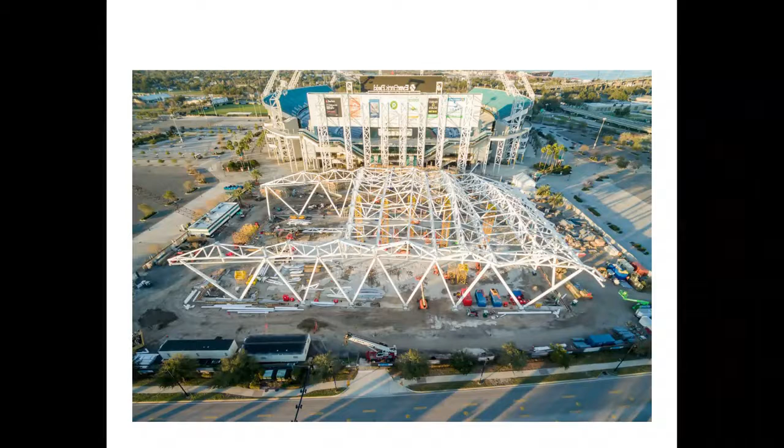Do you want to talk about this? This is just drone footage of the steel going up. Again, just to orient everybody, we're on the south end of the facility. The large mega doors occur in this zone here at the bottom. The amphitheater is in between the two facilities. At this point, there's only 3 trusses left to go up, so we're making tremendous progress.

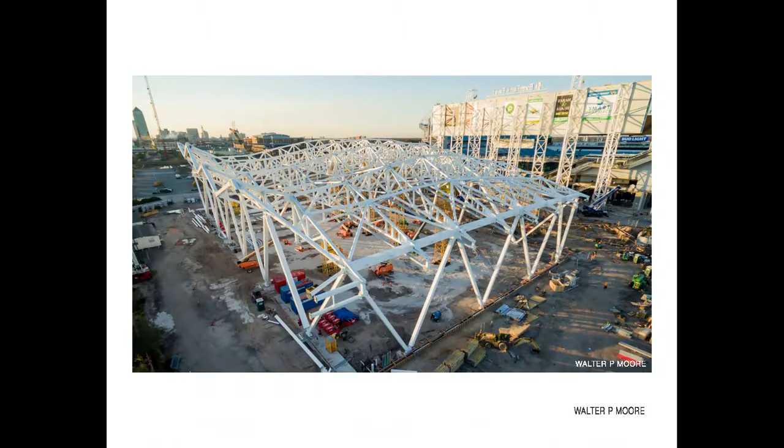And that's just more complementary. You start to see the folded ends of the facility, which were one of the hardest parts to go together, on the far left-hand side of the picture. So that's what you start to see, these things kind of hanging out there unconnected.

But the beautiful thing is, because of all the time and investment we put into it, no joke, this thing went up and every single piece fit. Obviously they had to hammer some things in, but we had two columns that were cut from the factory too short, so they had to splice them together. Banker Steel was like, hey Tom, Aisha, Joe, can you come check this out? Is this okay? It's going to be 70 feet in the air, nobody will see it.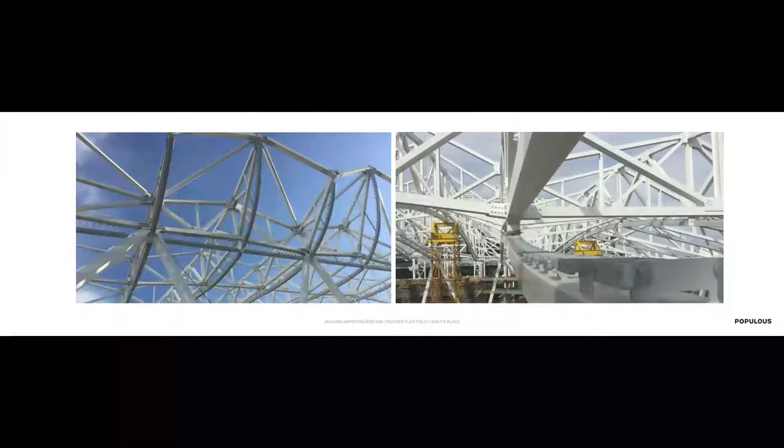And we're like, yeah, yeah. They showed it to us, and we worked on it.

So these are the cleats in the picture on the right. You see the cleat, that's how they tie the fabric. They're like little boat anchors, and they bring the fabric in there and bolt them together and pull them taut. I think at the end of the day there's like 86,000 cleats in the project that, as Steve mentioned, they modeled every single one of through a script, a Grasshopper script, based on spacing and tension.

Then you start to see the rolled members, the gray rolled members. That's what in the rendering you saw the white fabric with the gray strips. So the fabric went in after all of this. Can you imagine being in July in Florida, on a roof, installing fabric? It was crazy for these folks.

So here's two panels going in. It's a Sheerfill 2. We did them in long strips. They came in like 24 feet wide or so, by however long. They could be as long as they wanted, as opposed to us doing strips, because of two reasons.

Number one, we talked about the failure and collapse strategy. We analyzed what happens if a panel collapsed. Clients are always worried about a fabric roof collapsing, right? Like Reliant Stadium had a collapse many years ago, it was disastrous. So we did this analysis, and the owner got an insurance break on their deductible because we proved, using our analytics, to their insurance company that if we have a panel failure, it's only going to cost 20 grand to replace, not 60 million.

So then here's drone footage of the fabric going in. The amphitheater's at the top of the page. Along the way, we started to prioritize completion of the project. They had concerts lined up for May 27th, Memorial Day. Tedeschi Trucks Band, a local band in Jacksonville, was going to open the thing, so we wanted to make sure the amphitheater was good.

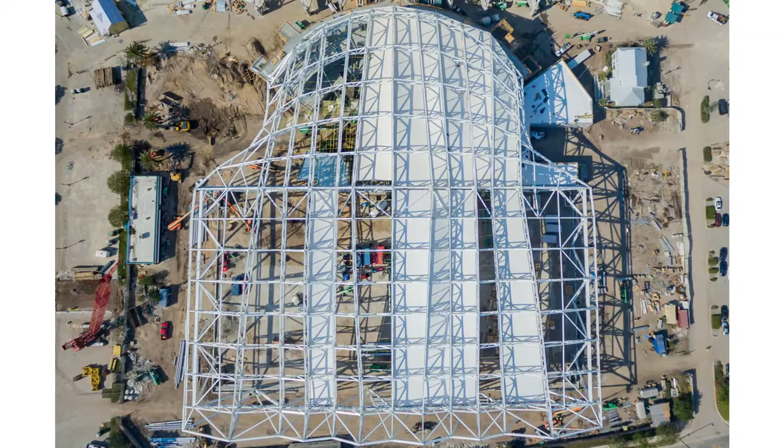So then next we went to the corner and bounced around, because the fabric comes tan originally off the shelf, and as the sun bleaches it, it turns white, this beautiful white color. On the underside - go back a picture - on the underside you see it's still that tan, right? So we didn't want half the building tan and half white, because it only takes about 30 to 40 days to bleach out the fabric. So we started skipping around, so on opening day you could see some patterning happening, which was an interesting coincidence.

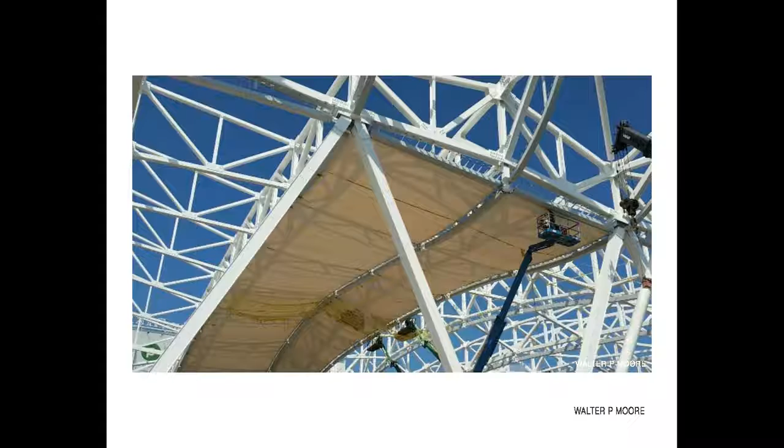So Steve mentioned the detailing, the waterproofness. As the architect and project manager, every time, the president of the team would be like, everyone keeps saying it's a stupid idea to put the roof on the underside. Are you sure you want to do this? And we're like, yeah, we can do it. And he's like, is it going to be watertight? We're like, we'll figure it out, we'll make it happen. And even at one point, it became such a product of the conversation.

We even approached them and said, listen, the contractor's saying if we put the roof on the top side, we could save 5 million dollars. Do you want to do it?

And Shad Khan said, no, I want to keep it like it is.

So then we had to design and fabricate these big boots that go around the V columns that come up through the building, so that we could create the cleats around the column for the fabric to tie into for water tightness. This is an example of a rendered Tekla model version that we ended up giving to Banker.

The digital model really helped iron out coordination issues we could see beforehand. We found a lot of things, like these long longitudinal trusses that are 430 feet long at one point, and there was a little bit of an error between how they converge and how the water drainage pattern comes in.

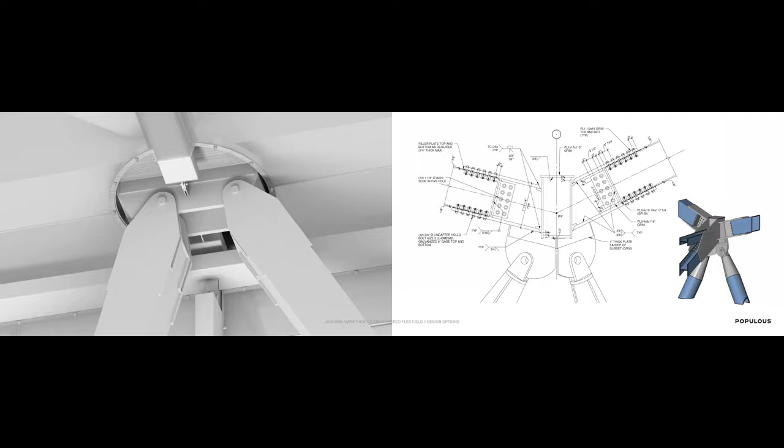We were able to use our Rhino model and do clash detection. We did some Navisworks stuff just from an MEP standpoint. MEP on this was a very small scope of work, but the Rhino model allowed us to really clash the fabric and the steel together.

These are good screen grabs of the cleats and the boat ties and how they're pulling the fabric together. So basically you had the secondary steel with these boat tabs on top of it, the fabric tied into it, and about an 18-inch gap at the top of every one of those secondary steel members.

Then they came back and had to cut and put fabric flaps on the top side and weld them together. You can weld fabric, no differently than—well, it's slightly different—but they weld the fabric down to the other fabric to complete that water tightness.

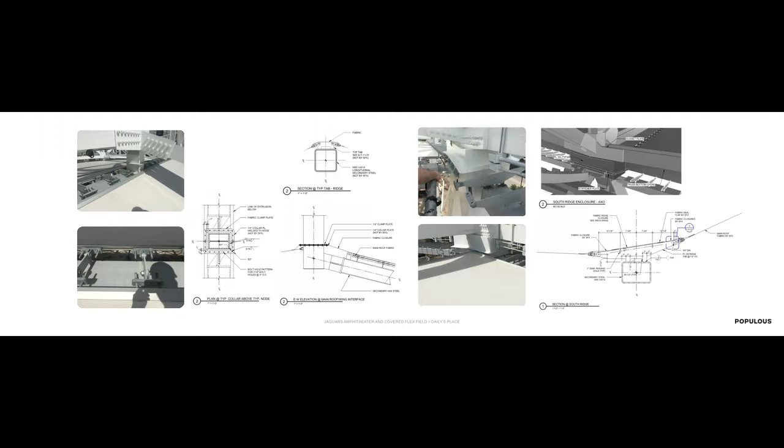We had three drawing packages. We had this landscape and civil stuff—we did all our early work stuff that was permitted. Then we did a GMP package that had architecture and MEP stuff, traditional. And the third package was an 11 by 17 book of nothing but details for all of this stuff, turned over as part of our record documents.

This is a topside view of the fabric, so you're on the roof. The roof fabric is as strong as metal deck, really strong—this is Marty standing on it. And in the far picture, Marty invented this little thing he can roll around on the roof to test the tautness of the fabric, because that's a big deal.

If you get a bunch of wind billowing up on this thing and it's bouncing, that's a problem. So they designed for the right pressures and strengths, and Marty's up there with another guy just checking it out, testing it.

All of those values he's monitoring were the point cloud data we had on the spreadsheets, so he was able to look at it in real time and be like, alright, this is supposed to be X and it's Y—contractor, you need to go up there and pull it tighter. Just as a simplification.

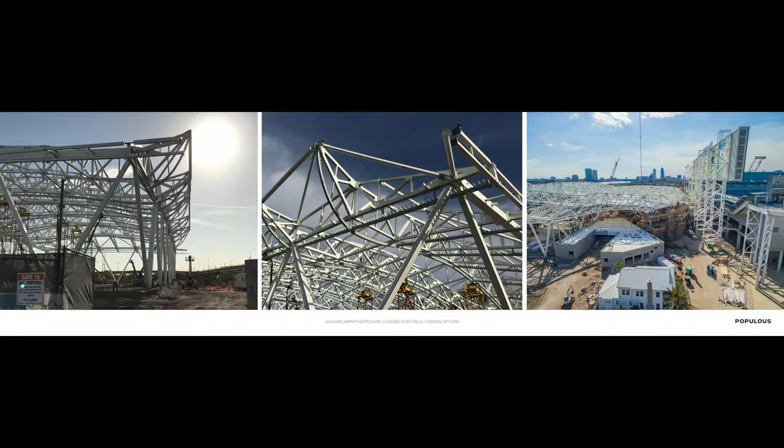Some good construction photos, just showing the brow starting to happen. The image in the middle is nearing completion—there's one more diagonal that closes it.

The far right one is the coolest image, in my opinion, because it shows the exposed nature of the scoreboard. The big scoreboard is about 120, 130 feet long. The little building in the bottom is the back of house building, where the artists go—the green rooms, dressing rooms, that kind of stuff. And the loading dock is the little notch.

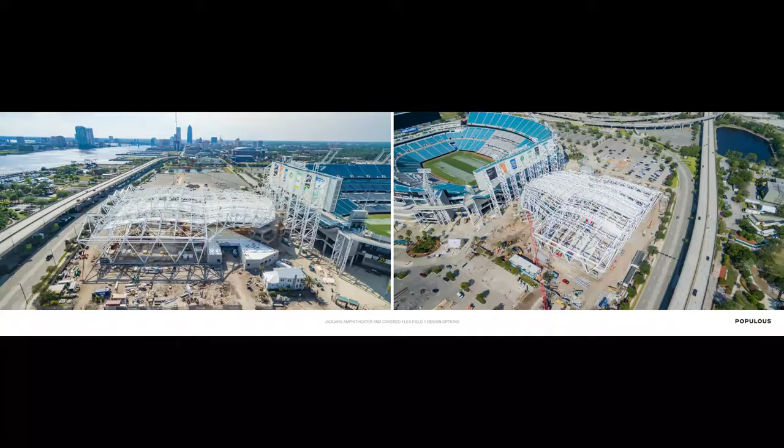Some better images—you can see how close it is to the water. When Irma came through, the whole ground, this thing was completely underwater. So, you know, and then obviously with the wind.

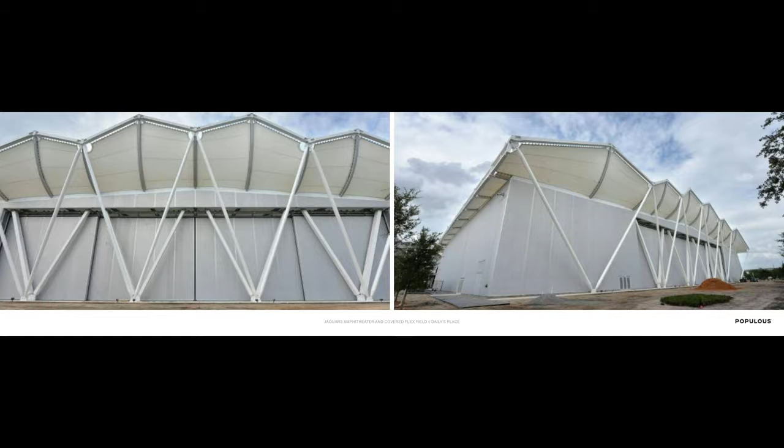Here's 2 construction photos of the skin and the brow, so you can see the openness of the doors. The white, or whiter material of the roof is that Sheerfill fabric, fully constructed. The gray is the Verseidag wall fabric, made out of Germany.

First time we ever used this, so we had to go through the process. If anyone's from Florida, you know you had to get FPA, Florida Product Approvals, and NOAs, and do fire inspections and all this stuff. So we did all that in real time using our model and giving it to the folks to do it.

This is the inside, again the practice facility for the Jaguars. This is inside the facility looking towards the south wall. The 4 panels in the middle.

This panel and this panel slide that way, that panel and that panel slide that way, and it's a 220 foot wide opening, 58 feet tall. On the other side there's a 60 by 60 opening that slides to allow the amphitheater to both be an amphitheater for the show, and then they can flip it around, do a 180, and have like a car show or boat show in the covered flex field with a stage to use. The sports lights are up here because they do practice at night.

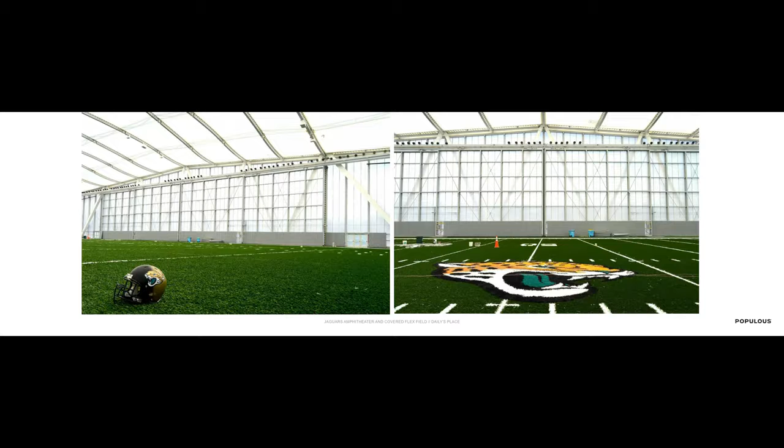I mean, it's at sea level as it is, so we had to go down, so hydrostatic pressures and all that stuff. So this thing's sitting on big piles, like 80 feet deep.

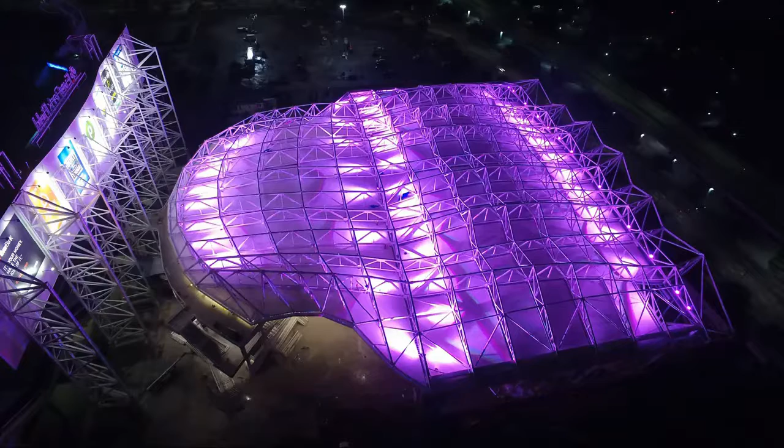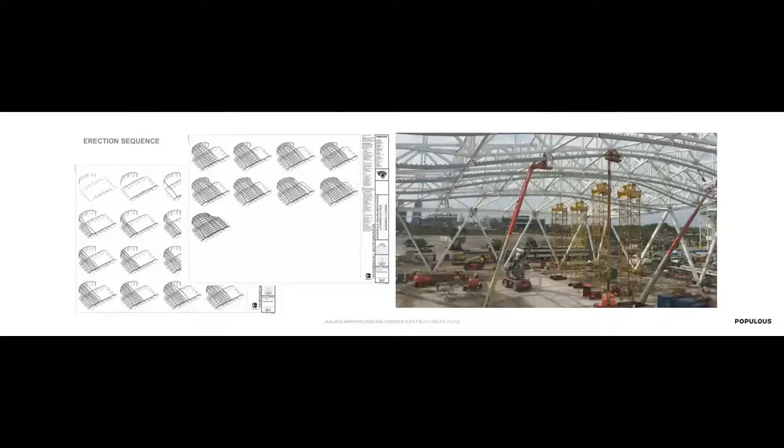Anything else? Yes sir, what's the estimated life of that fabric? I think it's warranted for 15 years, but Sheerfill, the Canadian company, is probably comfortable saying 20 to 25 years — but the moral of the story is a 15-year warranty. PTFE lasts a lot longer than PVC. PVC is maybe 10 years, but with PTFE they actually don't know how long it'll last. There's a project in California installed in 1970 that's still working. But they gave us a 15-year warranty.

So does the owner plan on a change-out in 15 years? We consciously talked about it. The other thing we discussed was all the steel that was painted and treated — the bigger conversation was when will they have to go up and paint the steel again, how hard that will be, and how much it will cost. The city of Jacksonville has money set aside for facility maintenance and maintainability, so that's been part of it. I'd say yes.